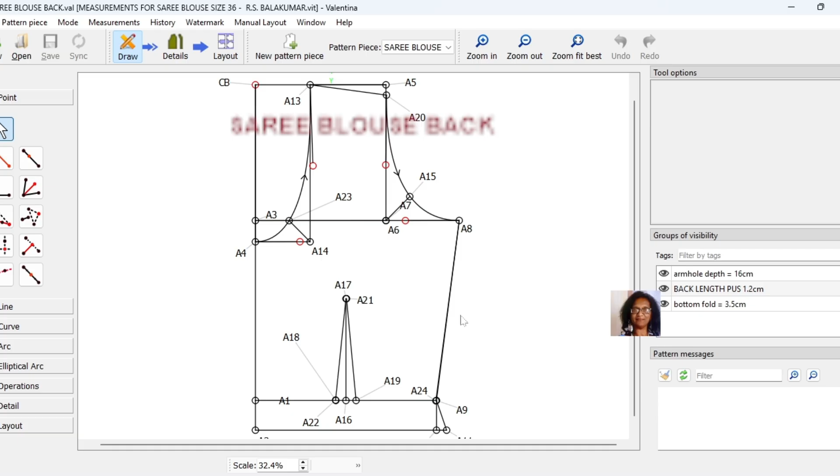This is the back of a sari blouse, a size 36. If you would like to know how to draft this pattern, follow my channel, I will post one at a later stage. This is the sari blouse back with a seam allowance and label. In this clip, I did not deepen the neckline or use the darts. I used the same sari blouse pattern just to show you that you can grade in Valentina.

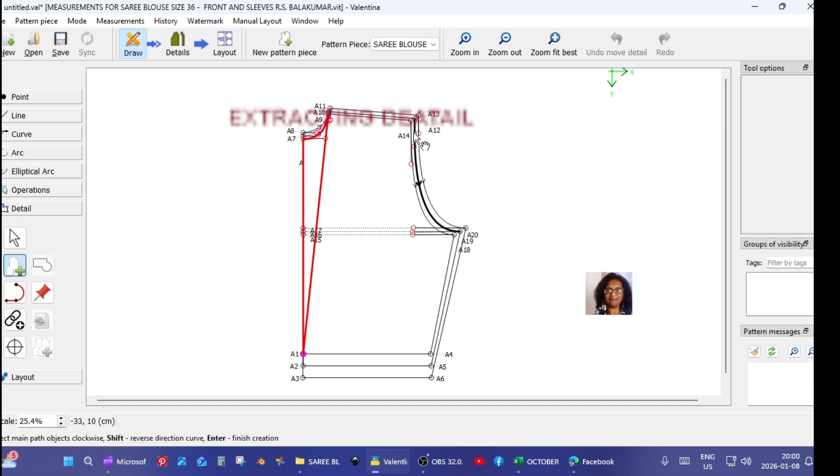I will now extract my different sizes using the workpiece tool. This is the icon under details with the plus on it. You click on that and you click onto the pieces that you would like. Once you've selected all the correct pieces, it will turn red and you press OK.

You press enter, moving on to the next piece. Make sure when you've got your curves, you click onto the curve and it must be facing in the clockwise direction. You press there and you press enter again and you get your pieces that you selected. You press apply and you press OK.

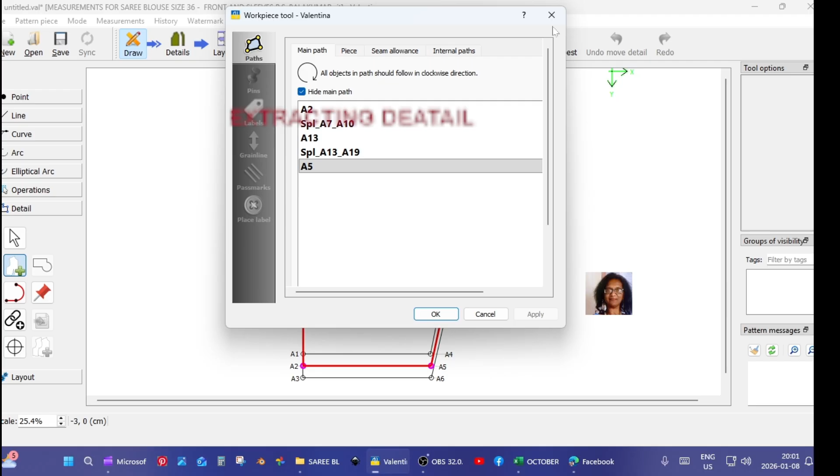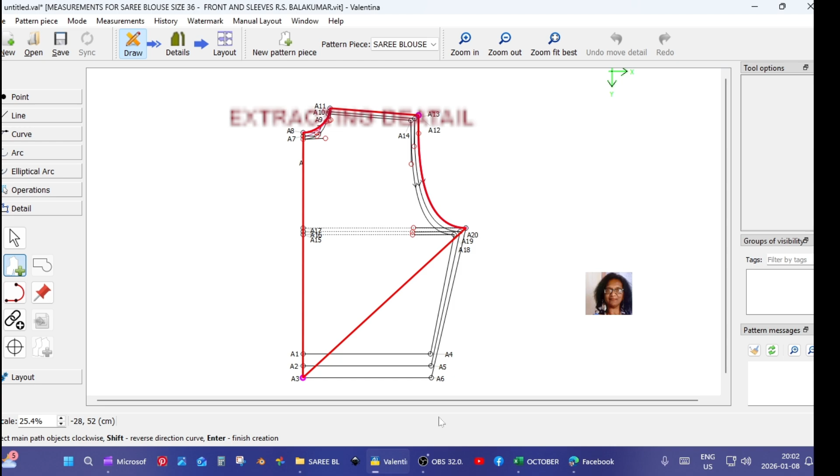And then I'm going to the third one, and you click here. And once it all turns red, you can see that you selected the right pieces. You press OK as just the same, and you press apply and you press OK, and then you go into the detail section and you find all your pieces that stay.

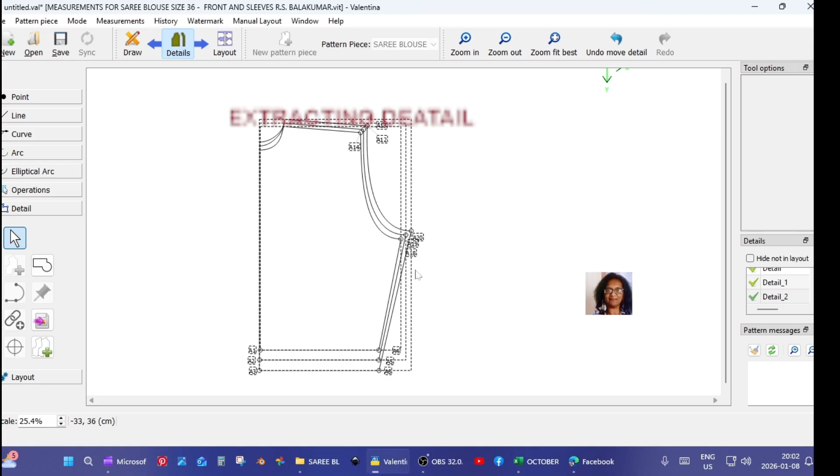This is my 3 sizes. There's the 3 sizes that is graded, and you can also separate them.

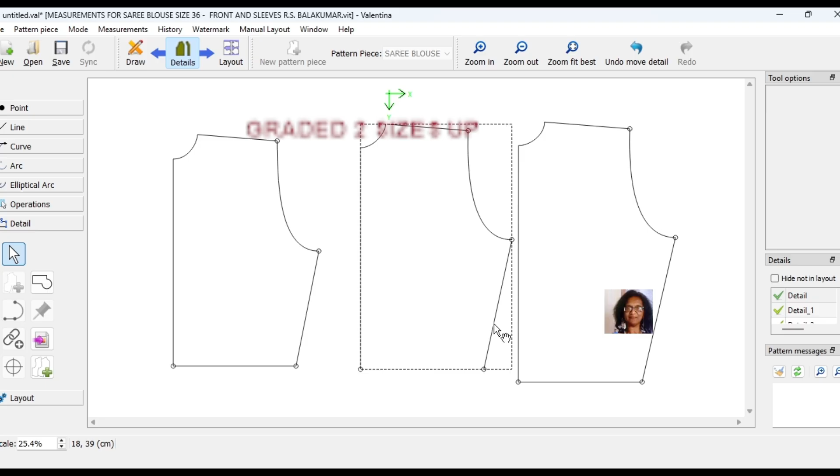Fortunately, the software also has provisions to enter your measurements, which would make it much easier for drafting your pattern. You also have an option of creating variables, that is all your measurements, for example your bust divided by 4 and your waist divided by 4, etc. And you can save them, your measurements and your variables, for future use.

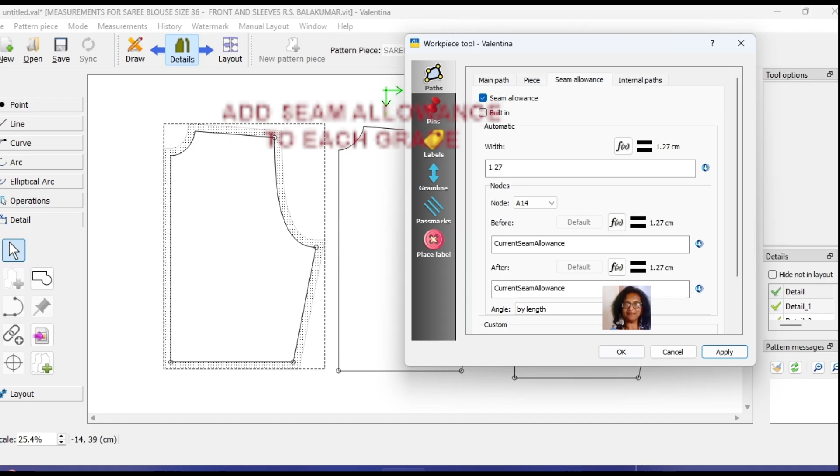My name is Romola. Through experimenting, I learned to figure out how to go about it. There's plenty more to learn, and I will try to figure out how I can do it much more in a simpler way.

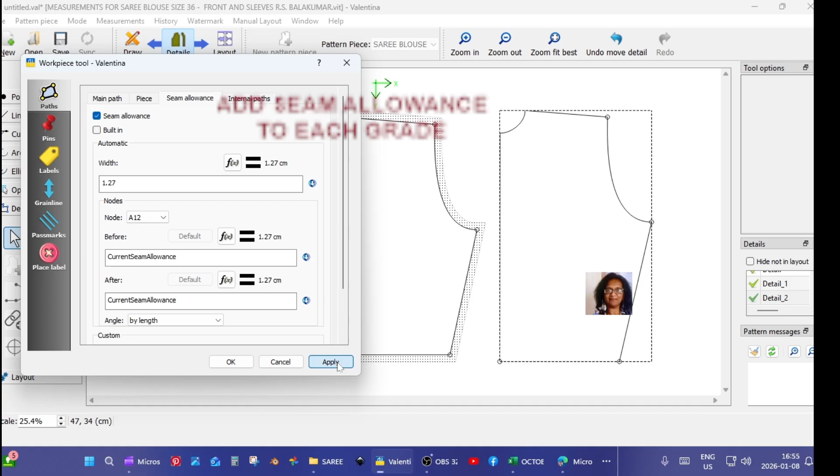My knowledge on how to grade in Valentina is self-taught. So if I achieve a high volume of audience, I will decide to post a video on how to grade based on that.

Before attempting to learn how to grade a pattern, be sure that you learn the software thoroughly and all its tools and functions. Also the mathematical side of the drafting.

I find Valentina a great free open source software to use to create your patterns.